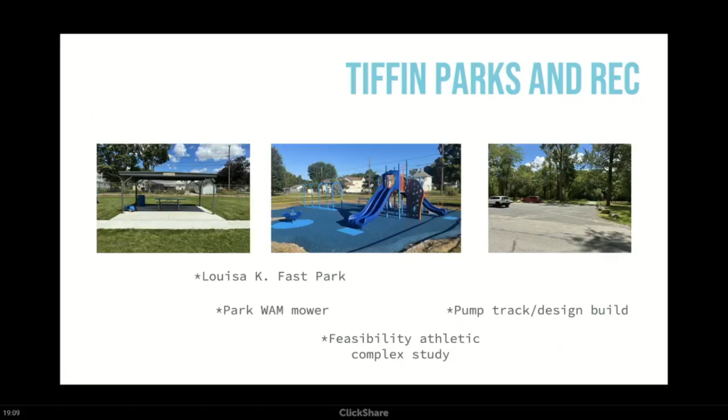2025 events, we were able to kick off our Oakley Park cleanup as we always do. We had our pitch hit and run competition after it had rained and we had to cancel and reschedule. We have our annual band bash, which is always a big hit before we go back to the school season in August at the East Green. We always partner with the downtown Taste of Tiffin event.

Our Thursday night tunes, it was a weird year, I think, because it was such a hot year last year. Our attendance kind of tanked a little bit. So we looked at some new performers this year and see what kind of transpires this coming year with that. The special needs community swim is always a big event for us.

It's every Thursday from 11:30 to 1. Any special needs individuals are able to come use the pool for free with just a paid admission by their caretaker and/or parent or grandparents or whoever would be bringing them to the pool. It just kind of allots their own time for the pool, because it is loud, obviously kids screaming, the slides going. So it's just a little calmer environment rather than a normal operational time.

4th of July is going to be, this is last year, sorry, I'm about 4 slides ahead. 4th of July is our typical 4th of July show. We always have our fun car show in the morning, which is fun. It kills kind of a 4 or 5 hour window for individuals before activities seem to happen around town, especially for us.

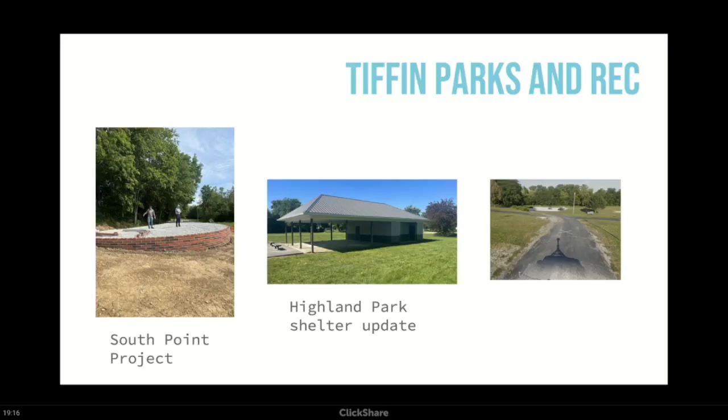Picture on the right will be going down to the new South Point project, which would overlook the wetlands. So we're just going to kind of change this entryway here a little bit because you have the road that would go down and go to the barn, or the trail would be to your right. And there's a lot of confusion as to where I can go, what I can do when I get down there. So to help deter individuals from driving down into the South Point, we're going to rework this and kind of eliminate the pedestrian and vehicular traffic accessibility there.

So a larger show means a more expensive show, I should say, means larger shells, which means higher up in the air. So every inch of shell we have, we need 75 to 100 feet of fall zone. So we'll be launching, I'm not launching them, we hire a company to do so. We'll be launching about 800 feet in the air. So we need about 800 feet of fall zone. So we're going to be shutting that whole north side of the park down across from the YMCA to make sure everybody stays safe during that day.

We're very excited. We got Wally and the Beef. That's been like a 2-year deal to get them on site and get that in the works. So we're very lucky to have them be our main performers. And then Spoiled Rotten will be kind of kicking it off for them at 4 o'clock. So hopefully we'll see you guys out in the park that day. I know we'll be out there Saturday at 6 a.m. and we'll be leaving about Sunday at 2 in the morning.

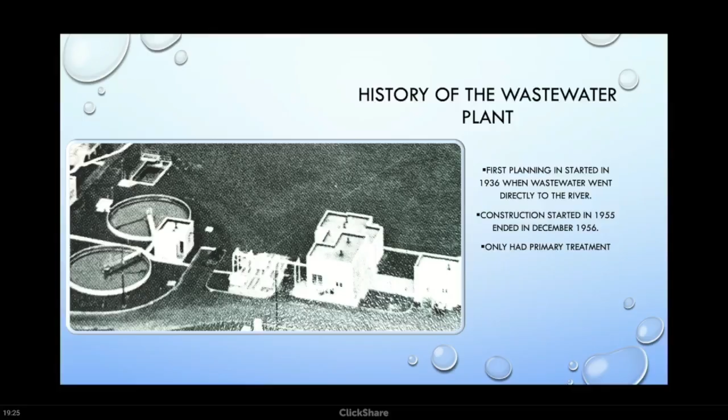The plant was originally built in 1955 and went online in '56. It only had primary treatment at the time, and that went on until 1968, when they added secondary treatment and chlorine for disinfection before discharging to the Sandusky.

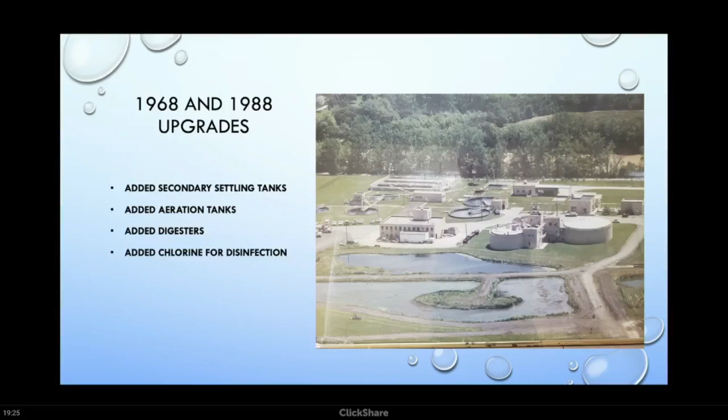Then in '88, they added digesters and aeration tanks to the plant for secondary treatment. In 2015, the city revised the long-term control plan, and part of that plan was to get down to no more than 4 CSO events per year.

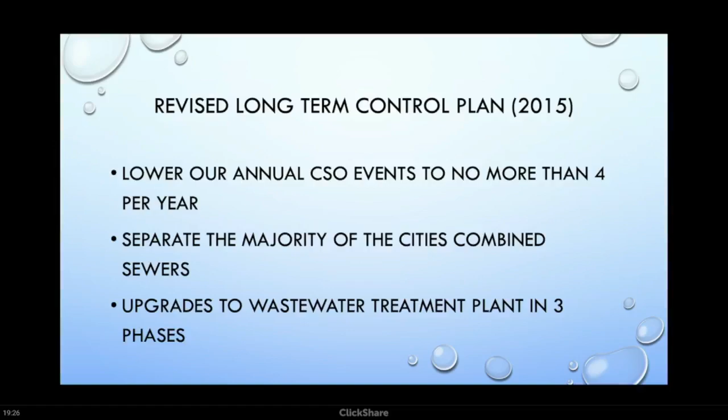As far as the wastewater plant goes, there are multiple phases to that plan, but the treatment plant had about 3 phases. The first phase was in 2015 as well, so that part of the wastewater plant was upgraded.

The bar screens you can see on the top left are our old bar screens, where we had 3/4 inch gap screens, so it passed a lot of solids through there. They were mechanically raked into buckets, and the operators had to dump those buckets every morning into a trash hopper.

On the bottom 2 pictures, you can see the new bar screens. The gap between those bars is 1/4 inch, so it screens out a lot more material, protecting the downstream equipment. All the solids are scraped off of there into a conveyor belt, which is then washed and compressed.

So your organics wash back into the wastewater to keep them in the plant, and then the paper and things like that are screened off into the waste hopper.

The other pictures on top show the aeration tanks were also updated. You can see in the middle picture there, that's an old picture when we had coarse bubble diffusers, and the picture to the right is when we upgraded to the fine bubble diffusers.

You got a lot better oxygen transfer with the finer bubbles. You don't have to use as much energy or air to get the same kind of treatment. The blue item in the bottom picture is the new high efficiency blower that was put in 2015.

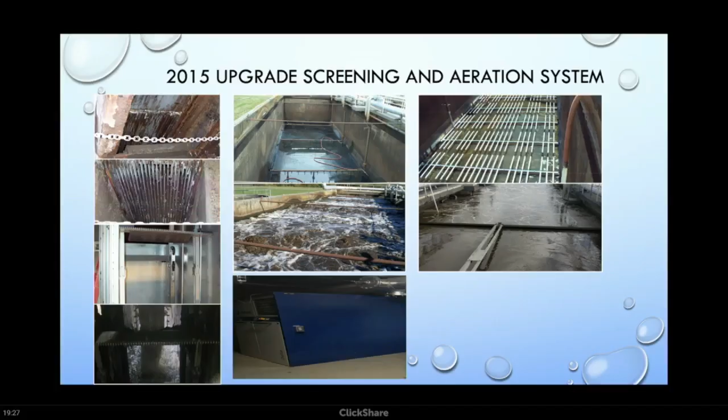So that took us to the next upgrade, which was 2021. The biggest part of that was to get the plant capacity from 4 million gallons to 13 million gallons.

That was achieved by adding, if you could see the highlighted round tank towards the right side of that picture, that's a secondary clarifier. That was the big part of adding capacity onto the plant.

Everything highlighted in green were new buildings. We also replaced a lot of pumps in some of the other buildings. We replaced all 4 of our raw pumps.

One of them was original from the plant in '55, and then the other 3 had been upgraded throughout the years, but everything was in need of upgrading for sure.

The square tank is an anaerobic tank, and that was a big part of this project as well because it allowed us to achieve biological nutrient removal, where right now we still use ferrous chloride to get rid of the phosphorus in our wastewater.

But starving the biological side of the plant of oxygen in that square tank and then giving them oxygen again allows them to use up that phosphorus, and we don't have to use as much ferrous chloride. We're probably about 40% less on average per year as far as that chemical goes.

We also upgraded our plant generator. The previous one, we were only able to run about half the plant in a power outage. That definitely could cause issues because in a storm, you need all your pumps, and if we lost power, we'd only be able to treat a fraction of what we could before.

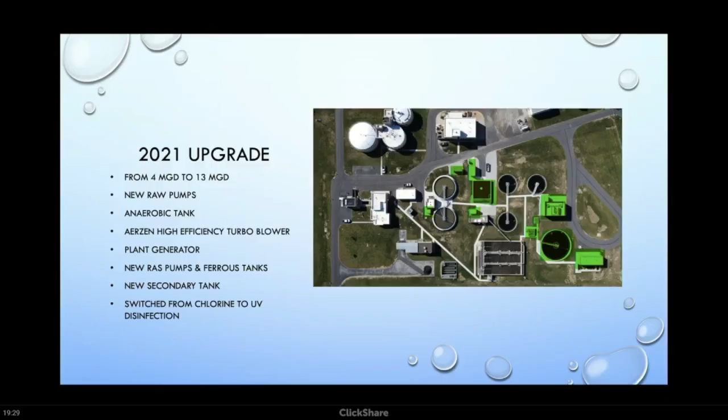So off hours, if we get an alarm call, we're able to log onto there and acknowledge the alarm, sometimes fix them. If nothing else, at least know who needs to go in. If it's an electrical problem or mechanical, we know who needs to go to the plant and respond to that alarm. But typically it's a fault on a pump or a motor or something like that, and we're able to at least get by till the morning by logging in.

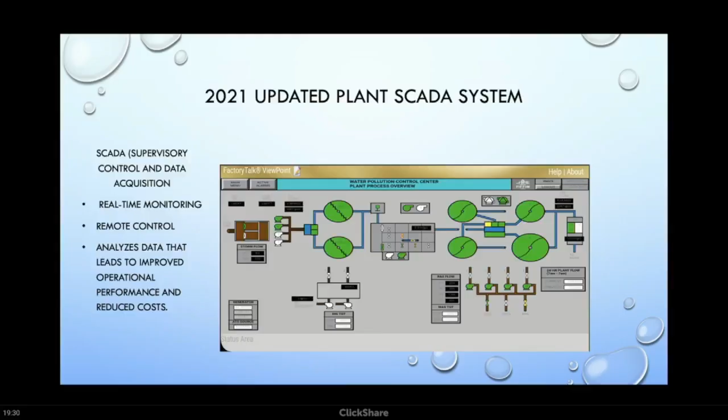So that kind of brings us up to where we're at right now. The city's part of the long-term control plan, like I said, was getting down to those 4 CSO events per year. Between the plant and we were looking at an EQ basin originally, like a 10 to 12 million gallon EQ basin.

But the downside to the EQ basin was once it fills up, if you have multiple rain events or consecutive days with rain, once that EQ basin is full, it's pretty much worthless until we get a break in the rain, and then you can drain it back to the plant.

So we ended up going with this high rate treatment. It's a cloth media filtration system. The model's called the AquaStorm. It will treat up to 32 million gallons a day. So between that and the plant, we can treat 45 million gallons a day. And if we have consecutive rain events, day after day, we can treat at 45 million gallons a day.

I have a short video just to play, so you guys can kind of get an idea of what the city's going to be spending money on, because it is a fairly expensive project. It's like 27 million. The bid was just awarded to Adina, so construction's going to start in the next couple months, and it's set to be online by July of '28. So I don't know if you could play that video, Nick.

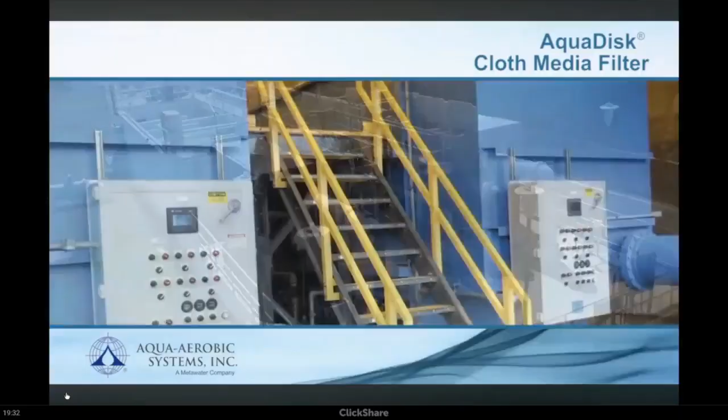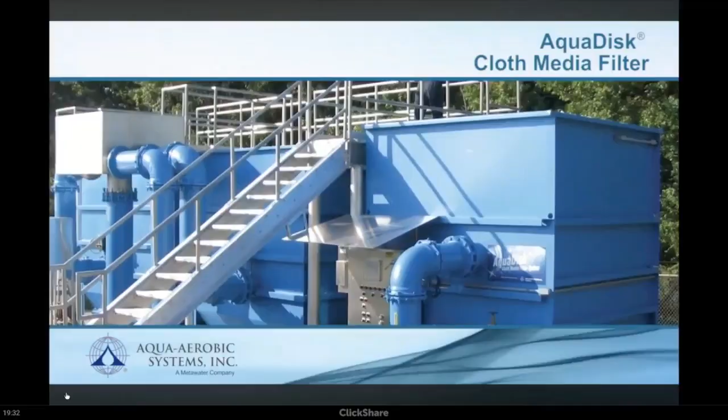Aqua Aerobic Systems cloth media filters have provided the solution for high-performance tertiary treatment for more than 20 years. This technology is capable of low-level phosphorus removal and producing reuse quality effluent. With more than 1,000 units installed, satisfied customers around the world realize performance benefits, cost savings, and ease of operation and maintenance with the AquaDisk compared to other filtration technologies. The main advantage of Aqua Aerobic technology compared to other filters is the exclusive OptiFiber cloth media. Engineered exclusively for water and wastewater applications, only OptiFiber provides maximum solids removal over a wide range of particle sizes, under a variety of conditions. OptiFiber media is suitable for virtually any application and is an integral component of Aqua Aerobic Systems' complete line of cloth media filtration products, including the original AquaDisk.

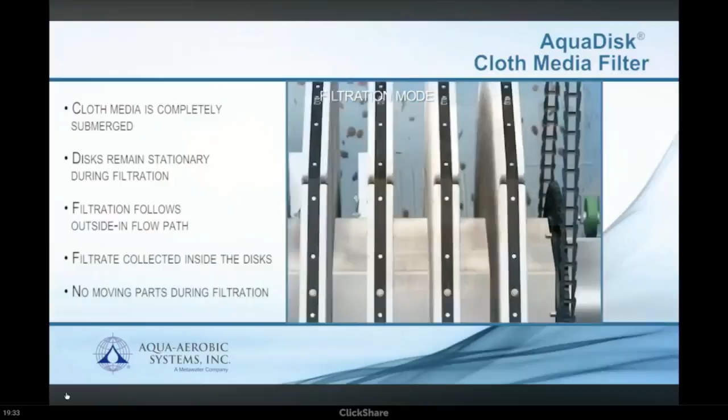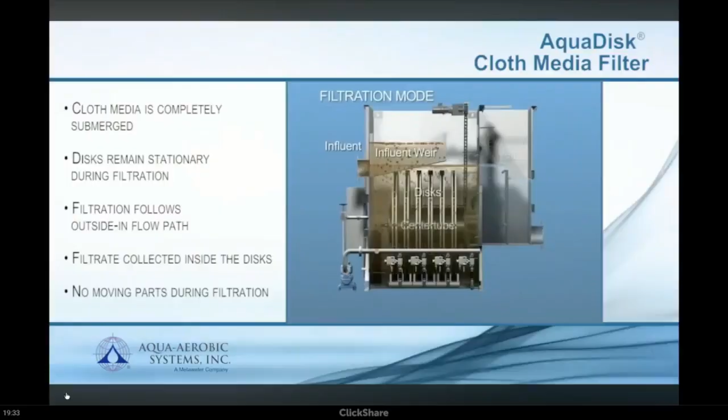Operation of the AquaDisk is accomplished in 3 phases: filtration, backwash, and solids wasting. During filtration, wastewater enters the filter tank by gravity, flowing over the influent weir and completely submerging the static cloth media discs. As influent passes through the cloth on both sides of each disc, solids accumulate on the media and a mat is formed. Filtrate is collected in the center tube, then directed to the effluent chamber and over the effluent weir. Head loss created by the solids mat causes the tank water level to rise, resulting in backwashing or cleaning of the cloth media.

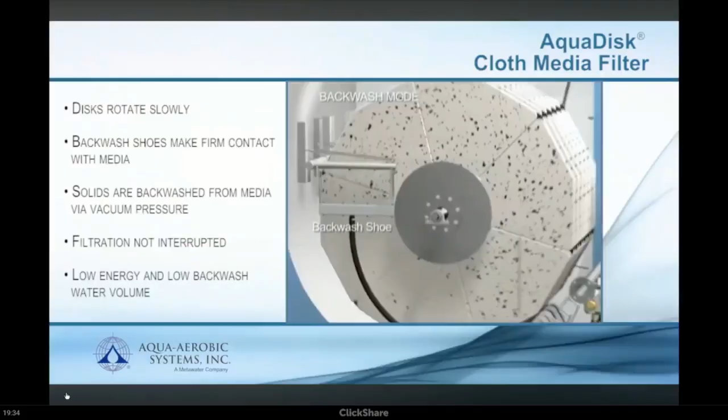At a predetermined level or time, the backwash cycle automatically initiates. Discs rotate slowly and solids are vacuumed from the surface by liquid suction on both sides of each disc. During backwash, discs are cleaned in multiples of 2, controlled by the designated backwash control valve. The backwash shoes make firm contact with the cloth media, maximizing effective cleaning. Backwash water is typically directed to the plant's headworks, while normal filtration continues without interruption.

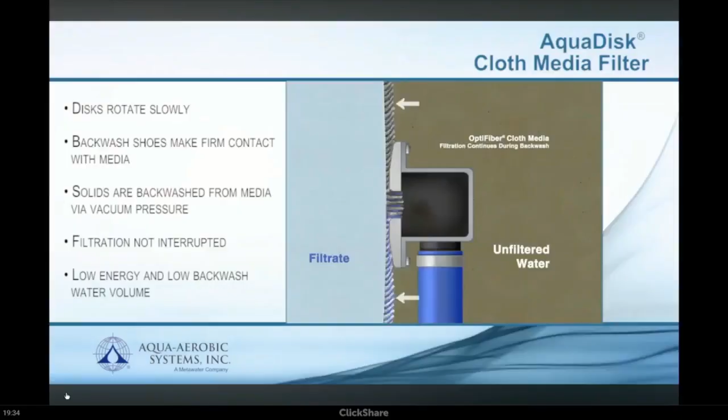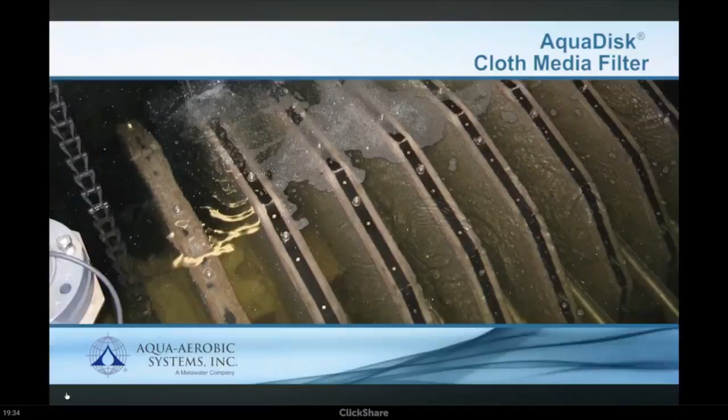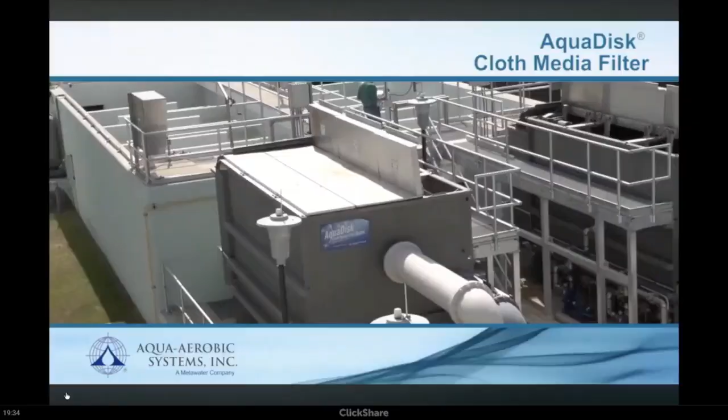Due to the vertical orientation of the cloth media, heavier solids may settle to the bottom of the tank. These solids are automatically pumped on an intermittent basis by a solids waste control valve back to the headworks, digester, or other solids collection area of the treatment plant. The AquaDisk cloth media filter requires no moving parts during filtration, encompasses the outside-in filtration flow path, and is fully automatic with a PLC-based control system. A history of exceptional operating experience and reliability make the AquaDisk the leading tertiary filter on the market today.

So they mentioned that when solids are collected, they're pumped back to the front of the plant, but ours is going to be at a remote location. The solids are going to be pumped back into the main sewer line, and then they'll make their way to the plant to be treated with the rest of the wastewater.

Another thing to note is, in front of that system there'll be bar screens, and then the water will go through those filters, then to chlorine disinfection, and out to the river.

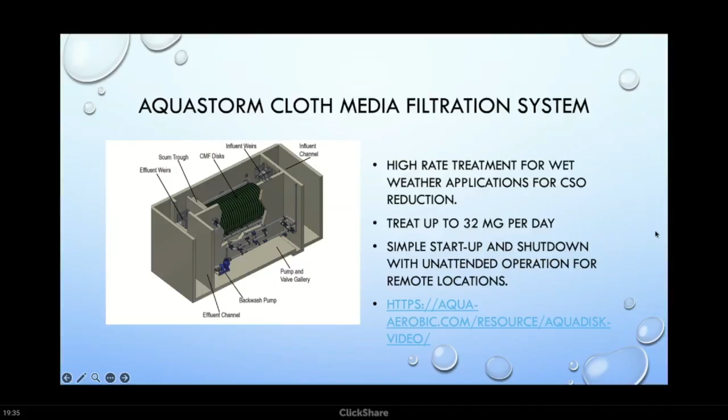We treated 1,306,000,000 gallons last year at the plant in total, and didn't have any significant EPA violations or anything. So the plant has been running really well since the upgrade.

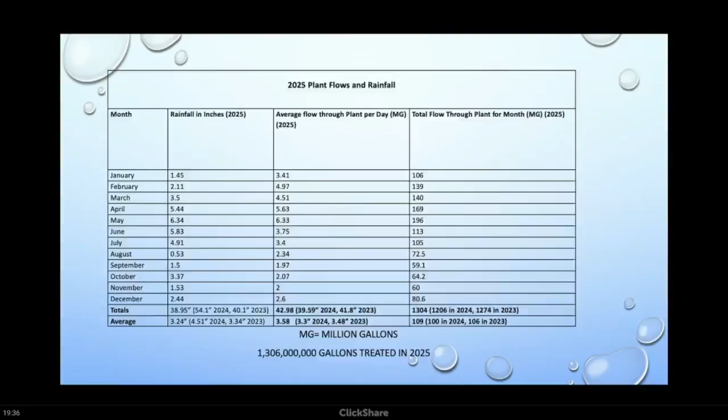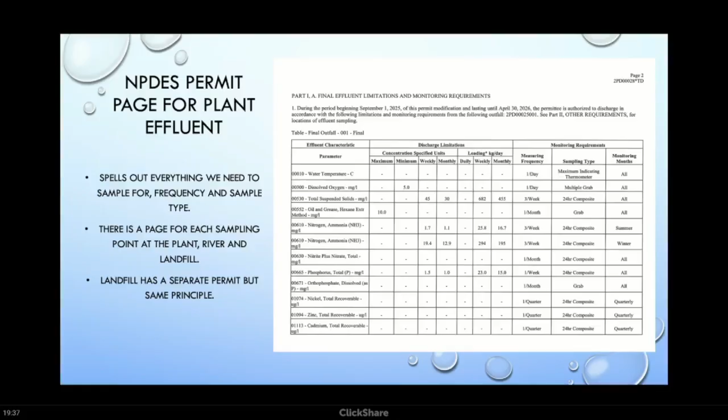Each sampling site has a code. This is a page from our final effluent, which is the water leaving the plant going to the river, so that code is 001. This page spells out the parameters we need to sample for, the limits for each parameter, and the type of sample—whether it's a grab or composite sample—and the frequency. Samples can be anywhere from multiple grabs a day to only twice a year.

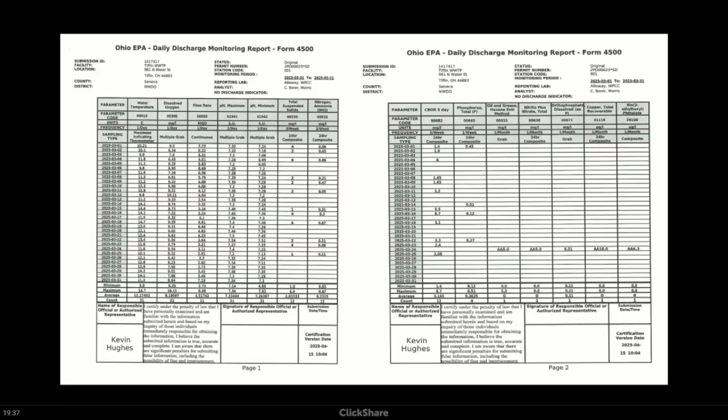Once we get all our data, each month we have EDMRs, which are our monitoring reports that we send to the EPA with all of our test results. We run quite a few things in-house, and what we aren't able to run we send out to a contract lab. We use Alloway for the most part—well, they just became Eurofins—and we use Bojan from Fostoria for some things.

In addition to the wastewater plant, we also maintain the city's 18 lift stations. Periodically all of them need cleaned, some more often than others. Our guys go out and check the lift stations twice a week, pulling pumps as needed.

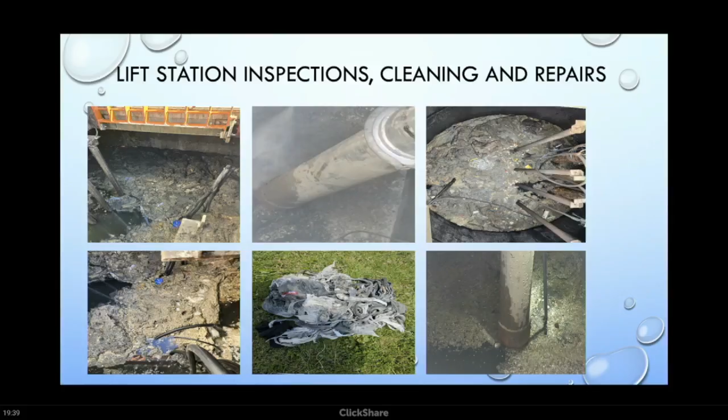The other pictures are some of the lift stations before cleaning. The top middle and bottom right ones we're in the process of cleaning—that's the Vactor tube down there. The street department usually helps us out with cleaning those lift stations.

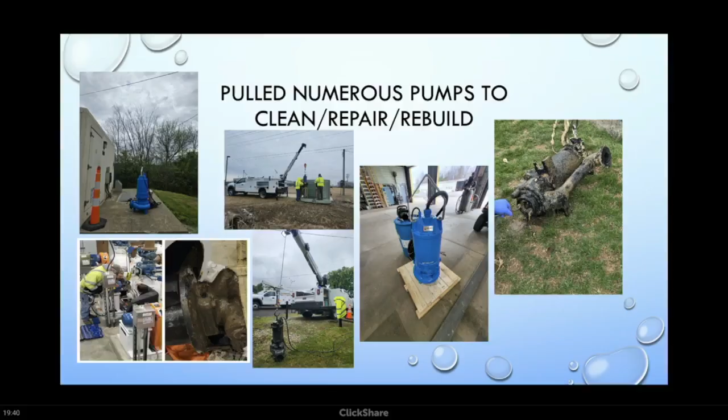We had Great Lakes Concrete Restoration at the plant for the third year in a row, just doing some work on all of the buildings that haven't been replaced, and they're the original buildings. They've done a lot of grinding joints, replacing brick, tuck pointing. This year they worked on a lot of the window lintels.

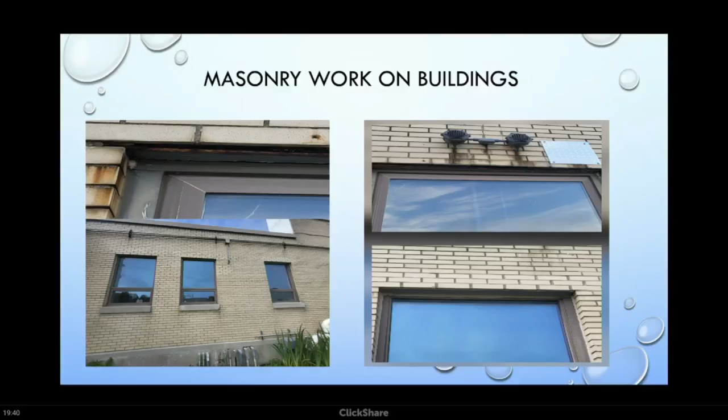So biosolids land application, that's a big part of our job, is getting rid of the solids that are coming into the plant. The solids that are removed from the wastewater that come in the plant go to our digesters, where they're heated and mixed for a minimum of 45 days. The digesters reduce the volatile solids, which are the organic matter in the waste, through a biological decomposition process. Basically, the bacteria consumes the organic material and converts it into a stable byproduct.

Ours produce methane gas, which goes to heat exchangers and then is used to reheat our digesters. So we're not using natural gas to do that.

So the digesters are then pumped out into our lagoon, and then from the lagoon we have EPA approved fields that we land apply to. So when wheat comes off in July, we're out hauling to the fields. We try to keep them as close to the plant as we can. And then again, when beans are coming off in the fall, we're hauling.

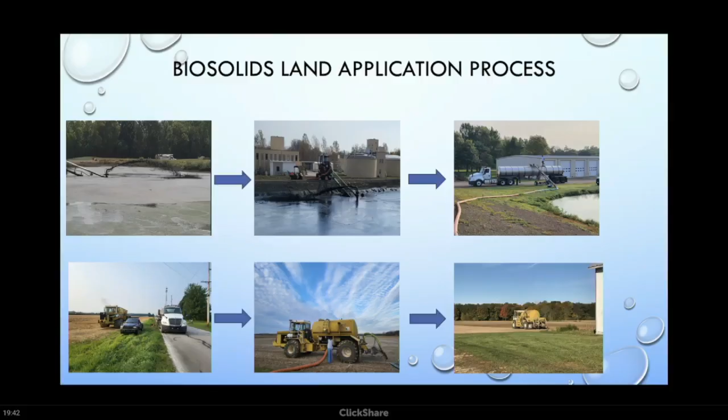We decided to go this route because instead of a water pump, there'll be a solids handling pump hanging from it. That will go into our lagoon and we'll be able to do the same thing as the tractor and the Houle pump. So it's going to replace both of those pieces of equipment, and it's going to replace one man in the job, because right now somebody in the tractor gets a signal from the guy in the truck telling him when to ramp the motor up on the tractor and shut it off when the thing is full.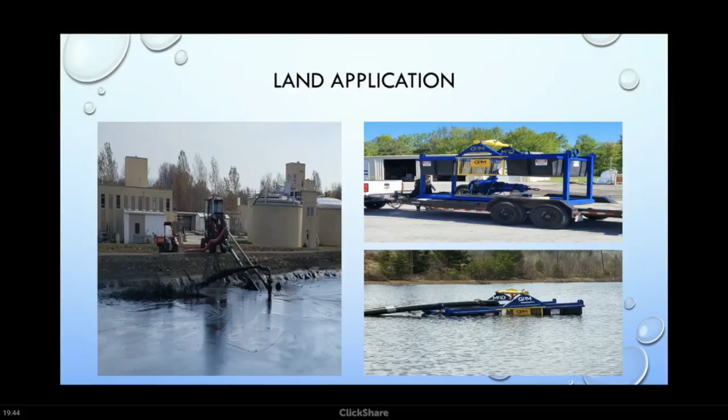So the way this will work is there'll be a controller that the guy on top of the truck will be able to turn the pump on and turn it off by himself. So there won't be a second person needed for loading the trucks. If you go to the next slide.

So right now we're working on getting power up to the lagoon. The guys have been doing most of the work themselves. We ran the conduit, got concrete poured on top of it. Most of the trench is filled in now. We're just waiting on a couple control panels yet, and we'll pull the rest of the wires and then have power up to it. My hope is to be using that new system by the fall when beans come off. I don't think we're going to get it done by mid-July, so that's my hope.

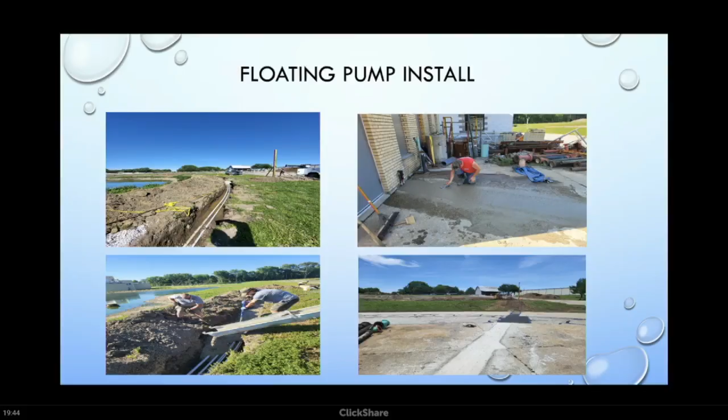This is just some of the numbers from last year's land application. So from the plant to the digesters, we pumped 3.7 million over to the digesters, and then we hauled 1.3 million to the farm fields. So a lot of that sludge that goes out into the lagoon is dewatered. So it lessens the amount that we actually have to haul.

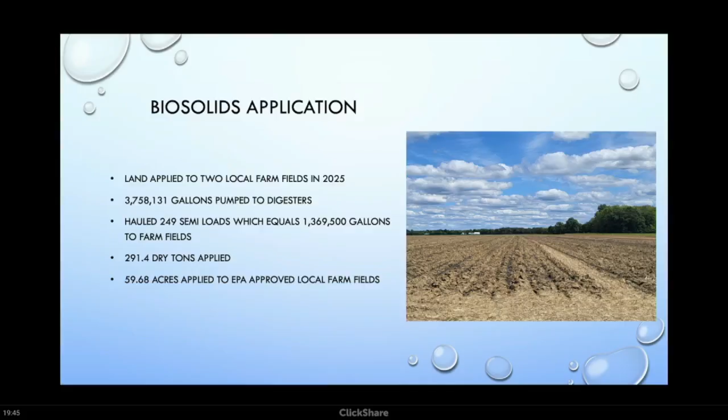And the goal, it's usually around 3% solids when it goes to the lagoon, and we try to get it up to anywhere from 6 to 9% solids. So there's less to haul. Last year we hauled 291 dry tons and applied it to almost 60 acres of local farm fields.

Also at the plant, we have the brush facility. We took in over 4,000 cubic yards in 2025. Wright Mulch was the company that was the low bid for that last year. So that was the first time we had worked with them. They did a pretty good job.

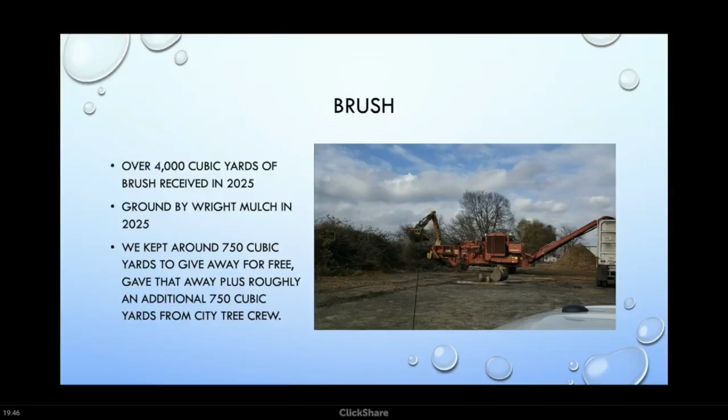We usually keep 20% of the brush pile to give away to the public. So we normally have mulch out there year round because we're getting it from the city tree crew as well. And occasionally we'll allow commercial haulers to drop off mulch if they've done the job in Tiffin and we're in need.

And also right by the brush pile, we take in leaves and we turn those at least 4 times a year. Those are broken down into compost. We took in 340 cubic yards worth of leaves last year. And October 1st, we give away that compost each year.

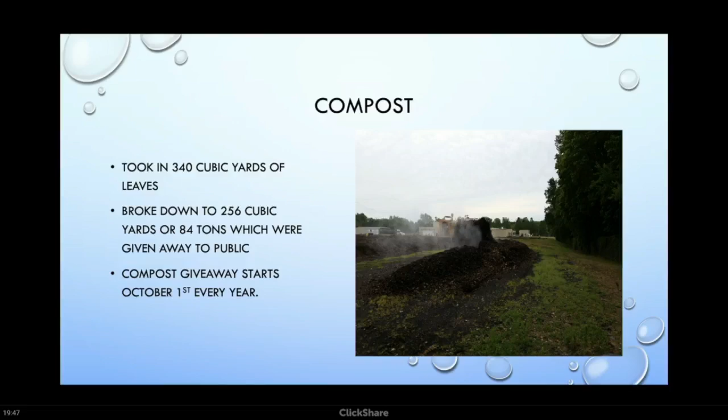We get a lot of calls about the compost, and it's pretty good stuff. If you want it, I would recommend you show up on October 1st. No matter what day of the week that falls on, if it's a Sunday, we're still giving it away on October 1st every year. Within the first week, it's usually gone.

Something else that we did, we're actually just starting this, but the city signed a contract with Voltus. Voltus describes themselves as a virtual power plant, and they pay large energy users to reduce or shift their electricity consumption during periods of grid stress or peak demand. So typically on a really hot day is when they might call, and for us, we would run our generator for 2 to 4 hours just to take demand off the grid.

So by signing the contract, the city gets $12,000 per year. And then when we do respond to an event, the city gets an additional $1,425 an hour while we're curtailing. We did this with Enernoc years ago, but when we upgraded the generator in '21, it didn't meet the standards that the EPA had at the time.

But Voltus reached out to us at the end of '25, I think, and they said that the EPA changed some of those qualifications, so we were able to qualify now, and so we're getting back into that. I think it started June 1st.

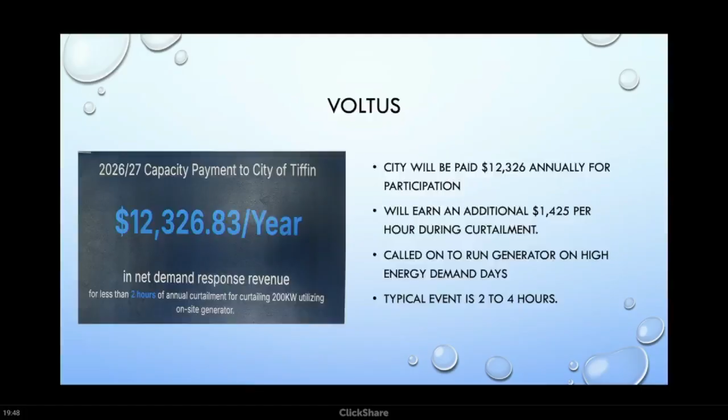At the main building, we had the lower roof replaced last year. Our newest operator, Isaiah, which I had mentioned before, passed his Class 1 this past year.

A side note, he's also getting married this Saturday.

We ran over 3,000 samples in our lab there at the plant. We run anywhere from temperature, pH, CBODs, ammonias, solids, suspended and total, and E. coli. We also completed our DMRQA sampling in '25 without any hits. It's something that the EPA makes us do each year. They send us samples with values that they know, but we don't. We have to run them and submit those numbers, and if we're within a certain range, we pass.

And thankfully we passed, and we really haven't had a whole lot of issues with that. So

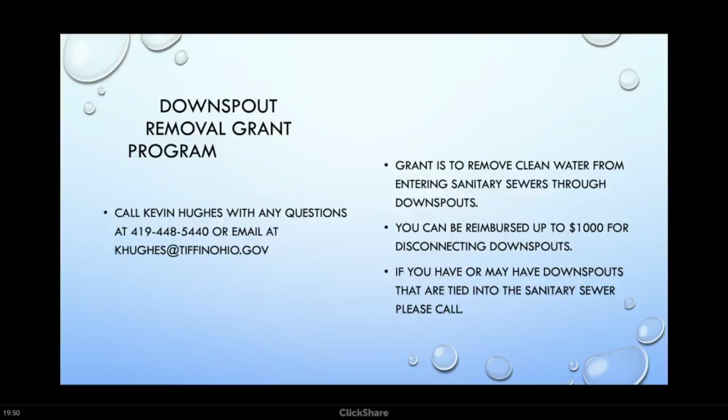One last thing I wanted to mention is the downspout removal program. That's still a thing. So if you have downspouts that go into the ground or you don't know where they go, if you give us a call, one of us from the plant, myself or Nick, usually can come out and identify or help you try to identify where they go. And if they are tied into the city sewer, there's the grant program that can reimburse you up to $1,000 to remove those.

I think that is the last slide. Yep, that's it. So, pending any questions, thank you.

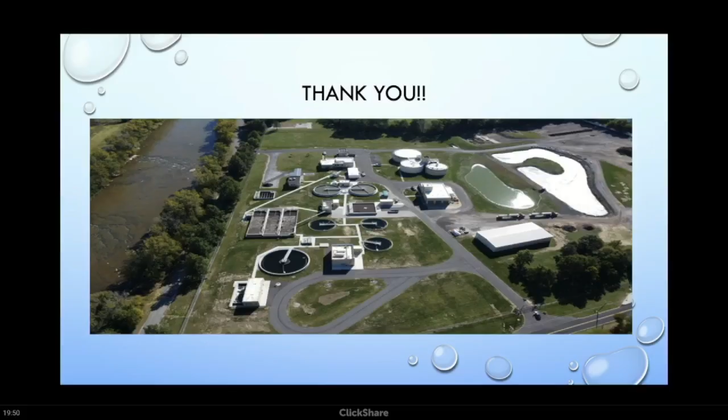I just have a couple things, Kevin. Thank you for all you do. I don't know if people realize that you guys are on call like 24/7, because if the electric goes out, if there's a lightning strike or something, you get an alarm go off on your phone telling you something's wrong, then you're out of bed and you're running to work, no matter what day, time, or anything. A lot of people don't realize that. They just think you go to work and you come home and that's it. Yeah. But it's more than that.

Yeah, one nice thing too about the 21 upgrade, like I had mentioned, the generator was upgraded. So the old generator was a manually transferred one. So if we had an alarm for a power outage, we'd have to go out, usually in terrible weather, and get that generator running, where this one will automatically transfer to the generator. And when it notices stable power back on, it'll transfer back to normal power. So that's been really nice.

That's good. And it's very technical. If you paid attention to all those numbers and all the reporting that you have to do with the EPA and testing and all that, it's very technical. So you guys have to go through licensure training to be able to do all of that stuff that you do. So yeah, I appreciate all of the extra work that goes into that. So thank you. Thank you.

And congratulations. Did you say it was Isaac? Isaiah. Isaiah, yes. Congratulations. He's getting married Saturday. Oh, yeah.

Exciting. But yes, I echo the mayor's comments of thank you very much for all that you do. That does not go unnoticed by us, and we very much appreciate it. Thank you. Anyone else have any questions or comments for Kevin? Yes. Just make a quick comment.